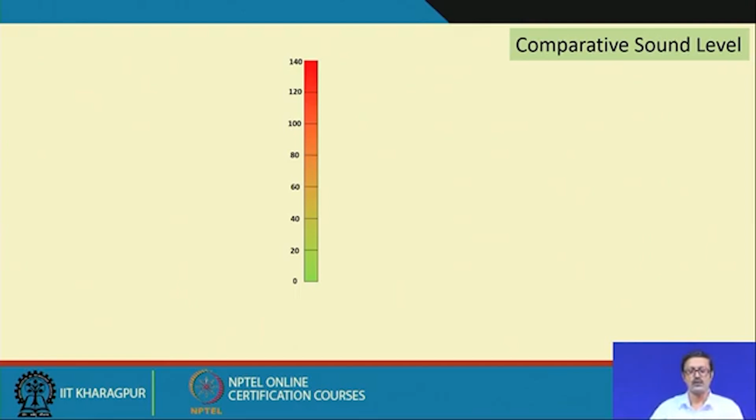So let us first compare the noise levels. This vertical scale indicates 0 to 140 dB, and on the left hand side I have put the different subjective feelings for such noise. 0 dB is the threshold of hearing and almost 120 dB is the threshold of pain.

Intermediately, communication starts to become very difficult when the noise level is just a little above 60 dB. Communication between people will gradually become difficult. That is one benchmark - the minimum level requires some amount of low background noise.

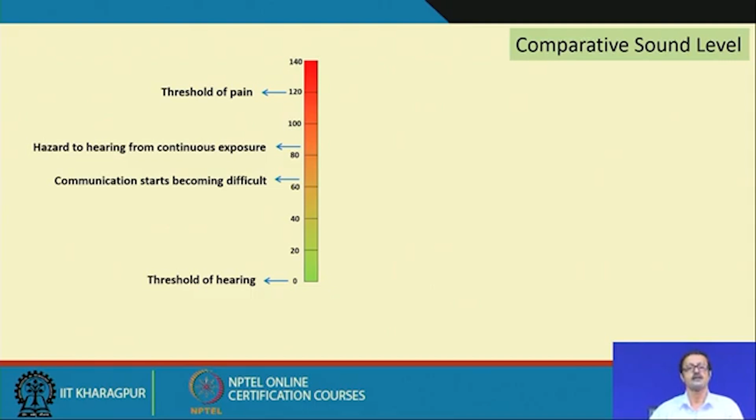And if it is a little more than 80, around 85 or so, it can be treated as hazardous, and that is dangerous from the health point of view if a person is continuously exposed to that amount of sound for a longer duration.

Now let us see the situation in different environments, inside and outside buildings. Around 37-38 dB is a very quiet bedroom, and a busy office is almost 60 dB or so. A car at a speed of 60 kilometers per hour, around 6 to 7 meters away, is almost 75 dB.

But if it is a truck at almost 40 kilometers per hour, a normal speed for a truck, again 7 meters away it gives almost 85 dB, and this depends on the condition of the truck and the road conditions. But if there is a jet aircraft, even 250 meters away it crosses 100 dB.

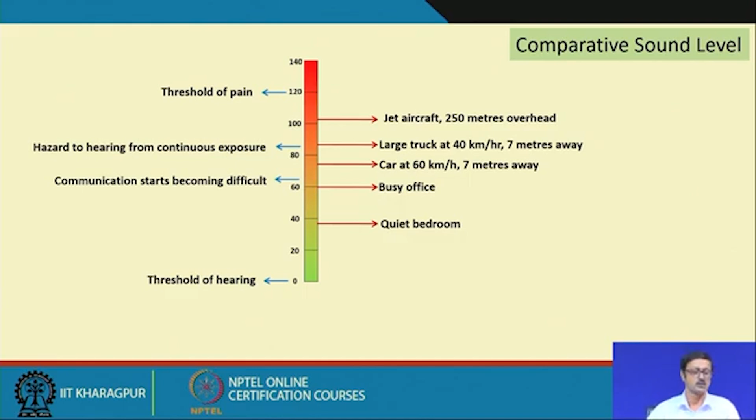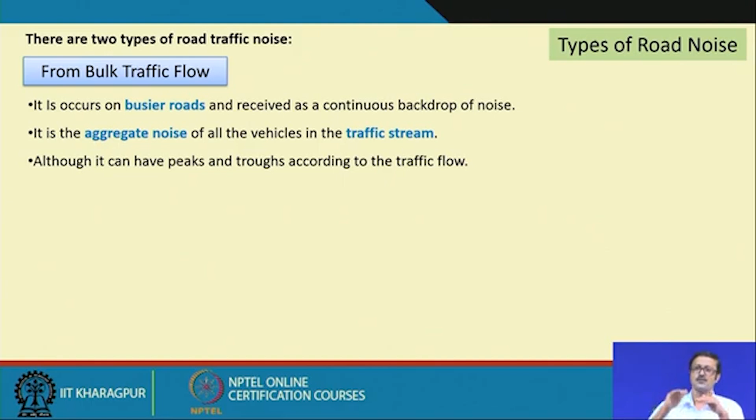There are two types of road noise. One is from bulk traffic flow, because of the mainstream traffic flow and its aggregate noise on a busier road, which has a kind of continuous noise level, sometimes with peaks and troughs, but normally it is an aggregate noise source.

The second type is from an individual noisy vehicle. Suppose it is a quiet road, but a noisy vehicle moves through with a siren, or maybe a honk, or it's a sports motorbike at very high speed, or some kind of commercial vehicle - that is from a noisy individual source.

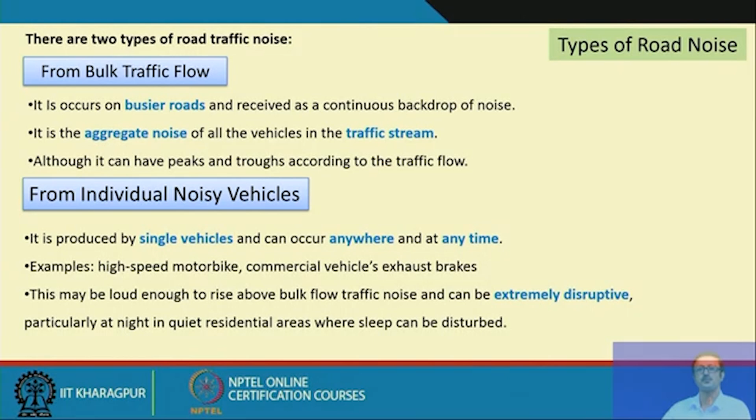So it is loud enough, and it is an intermittent kind of scenario where it shoots up and then goes down, and sometimes it is extremely disturbing, especially if it is frequent. In a quiet residential zone, this is going to hamper sleep, and it is problematic for old age people or infants.

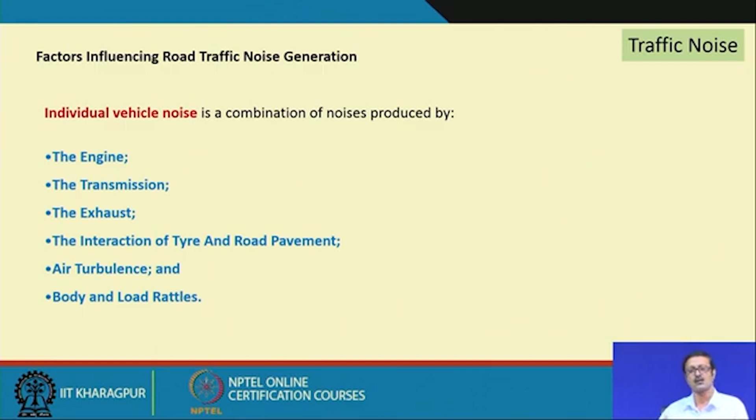In traffic noise, individual automobiles produce noise for several reasons: the engine produces noise, the transmission also produces noise, the exhaust also produces noise, the interaction between the tire and road pavement produces noise, and air turbulence and body and load rattles also produce noise.

Then there are 5 factors that have been strategically pointed out by the Central Pollution Control Board, after a lot of thorough examination and research, on which the level of traffic noise depends. The first one is the volume of the traffic; the second one is the speed of the traffic, the average speed of the traffic.

Sometimes, if the volume of the traffic is high, it is quite normal that the noise is also going to be high. The speed is again not directly proportional, but if it is high, the noise is also going to be high. But sometimes even at a dead speed, in a congestion kind of thing, you get noise because of the exhaust and the motor always running. So that also gives you noise.

So even if there is traffic congestion, that does not mean there is no noise pollution; it also produces some kind of noise. Then the traffic composition is also one of the issues. The traffic composition is a mixed traffic scenario: slow moving vehicles, some rickshaws, thelas and all, and with that there are cars, lorries, buses and bikes, which are of a bit higher speed.

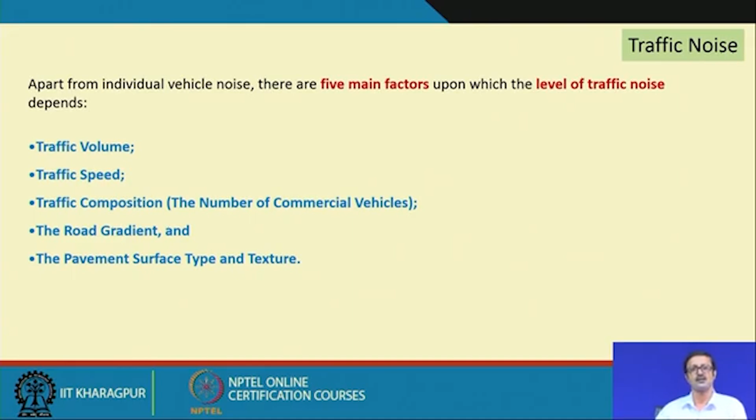In general, the road gradient is also one of the issues, the gradient of the road, whether it is steep or a flat road. The pavement type, texture and surface quality are definitely factors that also impact the amount of noise.

So first I discussed which components of an automobile produce the noise, and then the 5 factors of the road or the composition of the traffic. Then 6 major factors are also identified in our code or the pollution control literature, which from the propagation point of view contribute more.

The first one is the road profile, the grade, the elevated or the depressed road. The distance from the source to the reception point is also important. If you are farther away from the noisy road, definitely you are less exposed to the noise. The nature of the ground between the source and the reception point: if the ground is very hard, it is reflective. If it is soft, with greenery, it is absorptive, and it will not propagate that much sound.

The angle of view of the traffic stream from the reception point. Is it a direct angle of view? View and sound are very strongly correlated. The line of sight and the line of sound match each other. So if you cannot see the noise source because of a barrier in front, natural or man-made, it will reduce the sound also. The presence of screening, barriers or buildings, we will discuss in detail in the next lecture.

And the meteorological effects, like the wind, its strength and direction, and sometimes rain also can create changes in the propagation of the sound. So those are the 6 factors which affect noise propagation.

Now, the traffic noise mitigation measures. Our objective in this lecture, and the subsequent lectures, is how to mitigate that traffic noise, how to minimize it. You cannot just avoid traffic noise nowadays, it is impossible. Of course, you can reduce its impact with some strategies, and these mitigation measures are broadly classified into 3 categories.

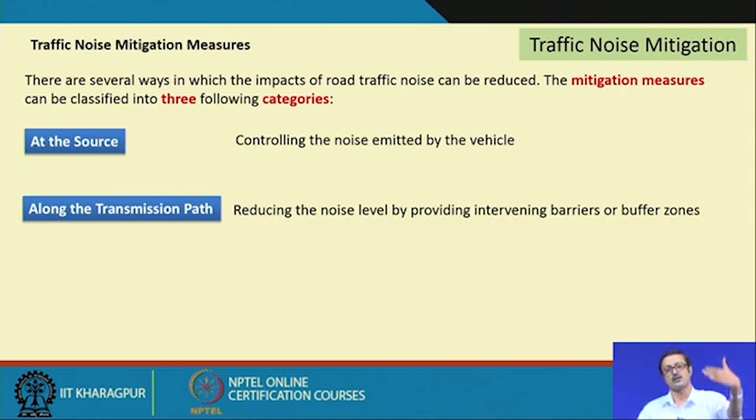One, at source: you can control the noise from the emission point of the noise source, that is, from the vehicle itself. And if you do that, you can minimize a huge amount of sound.

Sometimes we can go to the second category, which is along the path of transmission. The source of the noise may be a road, then there is a transmission path, and finally there is a receiving end, which is my building, maybe a hospital, maybe a residential zone. In this travel path we can also make some changes, some barriers, some landscaping, or some human barriers, which can help us reduce the noise.

And the third and final one is at the reception point, that means at the building level itself. You may not do anything at the source or on the path, or the path is too small because your building is very near the source, with no space for tree screening. So at the reception point you have to design your building architecturally, from the orientation point of view, site landscaping or site planning, in such a way that you reduce the sound.

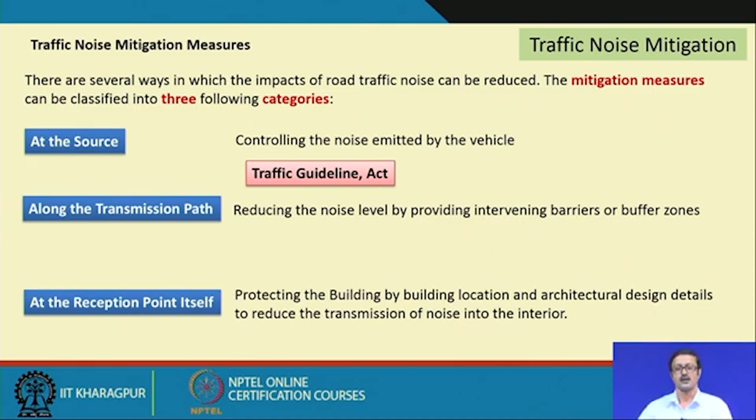If I want to do the first one at the source level, I need to put some kind of a very strong act, maybe some traffic guidelines, so you can reduce the source sound. If I want to do the second one, along the transmission path between the receiver and the source, then I need some kind of town planning act: this much area you have to leave, here you cannot construct anything, this much of wall, and so on. You can impose urban design guidelines to reduce the transmission of noise, or sometimes divert the noise in other directions so it will not disturb your noise sensitive zone.

And the third one is the reception point. Here you have to bank on the architectural design, because in the third case the reception point is a building you have to think about. So it is the duty of an architect to design a building and shield it from the outdoor noise. So, in a nutshell, this is the traffic noise mitigation technique.

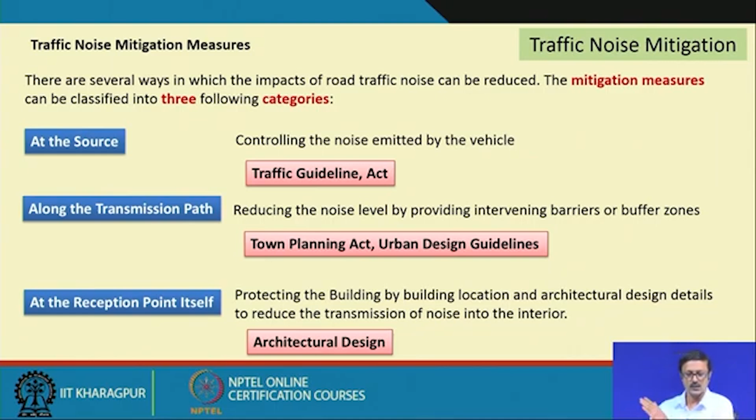In this particular lecture, we will discuss only the first one, at source. In the next lecture, lecture number 39, we will do the second one, urban noise mitigation through the transmission path, and in the last lecture, lecture number 40, we will deal with the architectural considerations.

So, noise control at source, as I have already told you, is the most effective way to reduce noise, because if the source is weak from the noise producing point of view, then definitely all your problems are solved. But it is very tough to do; it needs city rules implementation and a traffic management system. This control and reduction has to be implemented both for the bulk flow noise and for the vehicle noise. The following subdivisions can be made from this point of view.

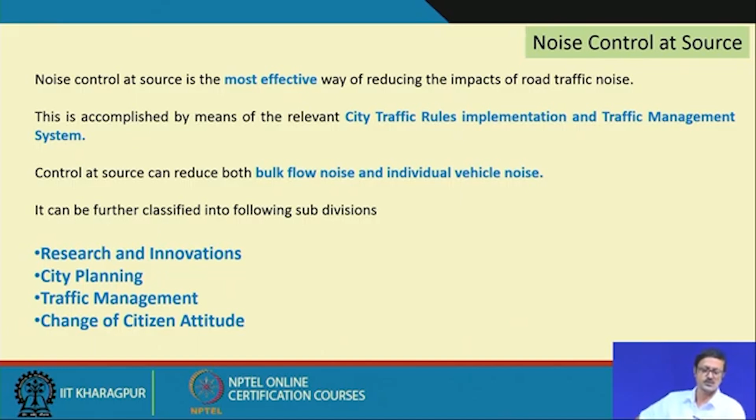Noise control at source covers research and innovation, city planning, traffic management, and also the citizens. From the research and innovation point of view, it is the development of new low noise emitting automobile machines, new tire technology, even new road surface materials.

Those are the areas in which research and innovations can be thought of or maybe implemented in our automobile industry, or maybe in the construction, road construction sector. That can reduce the noise.

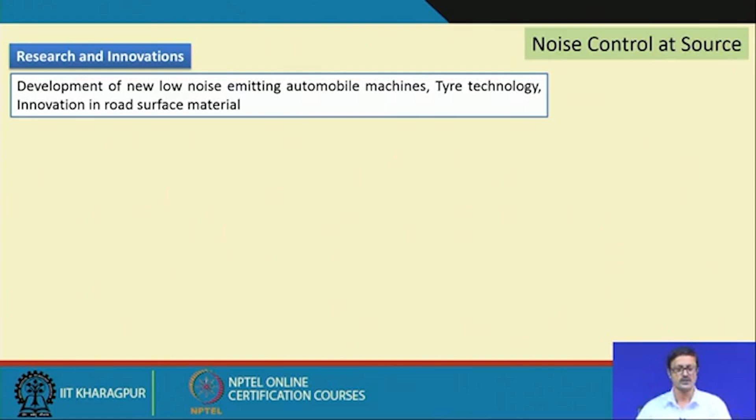The second one is city planning, town planning. The city planners may do some kind of zoning, or some kind of distribution of the noise sensitive zone, and proper land use planning of which areas of a city are very noisy. So you have to segregate in the master plan that this part will be used for the commercial zone and this part will be the residential or noise sensitive zone. So that kind of thing they can implement or propose.

They can also make some development control rules, in the sense that in this area this particular building type is not permitted, or in this particular area, if you have to construct some building, you have to give a minimum amount of setback. All those kinds of development control acts. Sometimes the high rise buildings may also be exposed to the noise, because there may be a boundary wall or some kind of barrier, so the upper floors are very much exposed to the noise.

So you can also develop some kind of development control act for high rises, on what will be the height of the buildings. Definitely city planners do that, but maybe not from the noise point of view. They control the height of the building because of the vicinity of the airport sometimes, or sometimes because of the gradation from one point to a deeper point from the road point of view. And sometimes, if it is a commercial zone, to utilize the maximum FAR. For those cases they limit the height, but maybe not from the noise point of view.

They definitely do some kind of micro zoning within a zone. Suppose in a satellite city, a part of the city is looked at in various micro sectors, and those micro sectors can be segregated or differentiated from the noise sensitivity point of view.

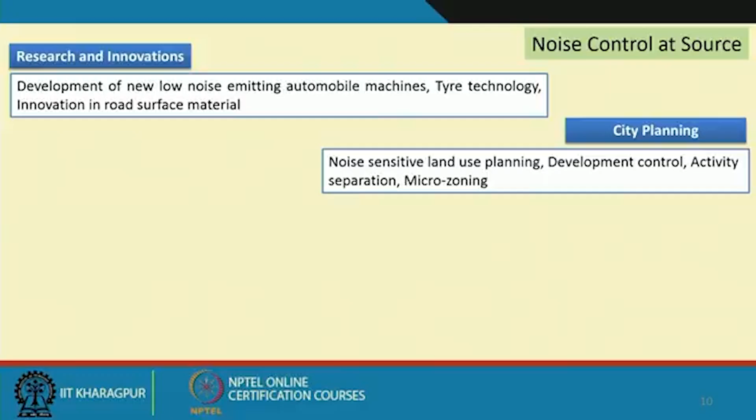The third one is traffic management. This is another important area that can minimize the noise from the source. Some traffic rules, some rules for overspeeding or for driving a noisy vehicle, so there may be some kind of penalty. No horn zones can be created in some areas. For the city traffic movement, no entry zones or rerouting zones can be thought of for a particular area.

And definitely this point is very much important, that is regular maintenance of the road. Sometimes you develop a road and you forget to maintain it properly. That is sometimes very problematic, since it directly gives a penalty to the vehicles going on that particular bad road, penalty in the sense of wear and tear, and it also creates noise scenarios.

And the last one is the change of citizens' attitude, and this is another one we just cannot ignore. Citizen sensitization, some kind of participatory activity is required, particularly from the very beginning, from kindergarten age to the matric standard or board standard students, because if you sensitize the children, then the next generation is prepared to take care of all those issues. Of course, the government is doing so, a lot of NGOs are also doing it, and the administration and police are also doing it, but citizens also have to change their attitude.

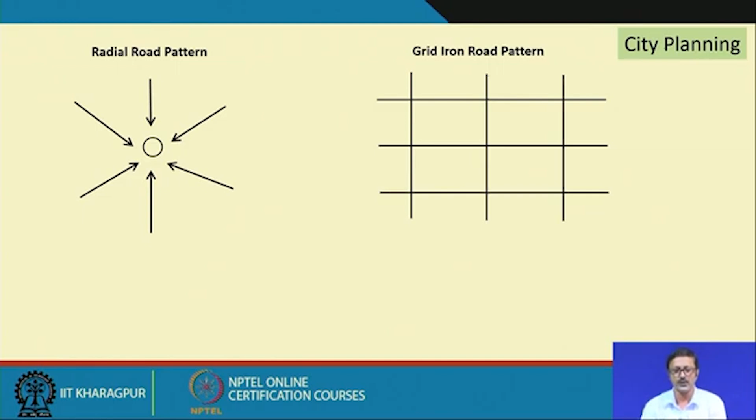So from the city planning point of view, there are a few fundamental things which I have noted for this lecture. There are road patterns: there is the gridiron road pattern, where the city falls in a gridiron way, and sometimes there is a radial pattern. If you see the plan of New Delhi, it is a radial pattern road; if you see Chandigarh, it is a gridiron kind of thing. So if I compare these two road network situations from the noise point of view, I must say this gridiron is good.

Gridiron is good in the sense that it provides less concentration of the noise, whereas in the case of the radial pattern, all vehicles are actually concentrated in a rotary or in a particular concentrated area. So the noise concentration is practically more in this particular area. So there you won't get the silent zone or the noise sensitive zone.

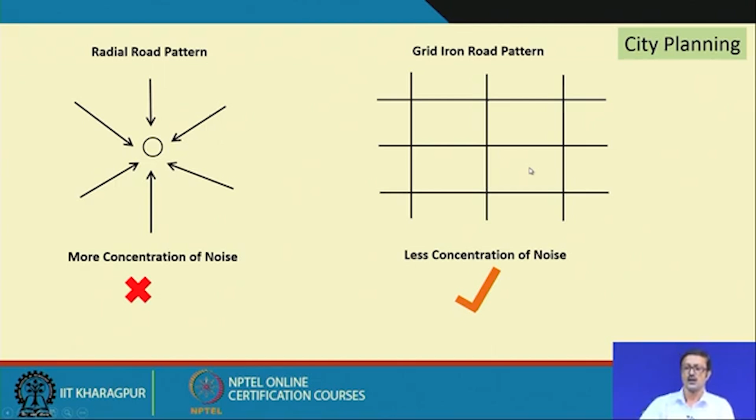Here, because of that, maybe in the central pocket in each sector you may get space for the schools, or maybe this particular one can be a school, one central space maybe for some kind of a park, and another one maybe for hospitals or a residential zone or so.

Now, next, suppose you take a gridiron pattern, and in that gridiron pattern you have two types of traffic scenario. One is a two-way traffic. These black arrows are indicating the road, and these arrows are indicating the direction. So here suppose there is two-way traffic, so in this road both-way traffic can flow, and here suppose there is one-way. So from this road only the upper direction, and from this the lower direction, and the right and left side direction flows are possible.

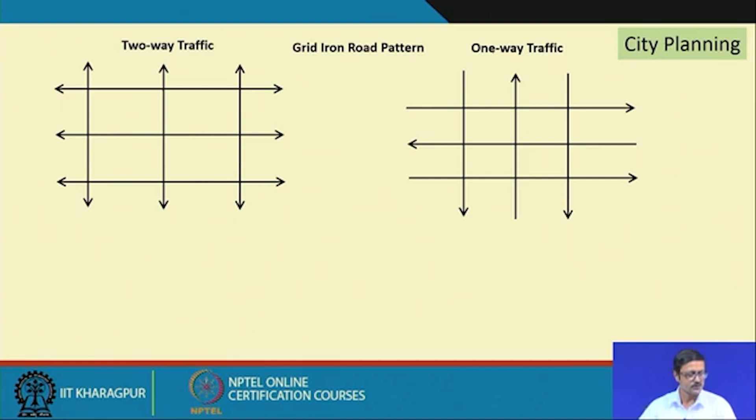So out of these two choices, if I want to see what will be the effect of the noise, then we must prefer the two-way traffic system, because theoretically if you concentrate a two-way over here, you will get a larger pocket area; that is number one. Number two, as we know from the very beginning, if two equal sources are added together, the decibel level increases by only 3 dB.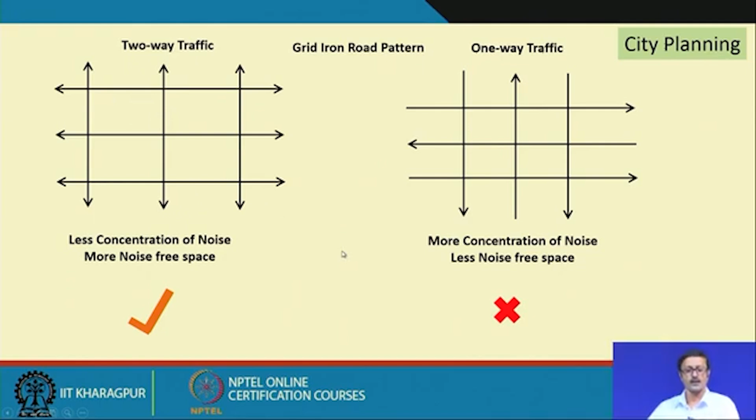So suppose this is source A, this is source B, and this is another source C. If these two sources are added together and put as one source, then only this particular road will be increased by 3 dB, if I assume that both roads' output is the same. So it is just a 3 dB increment in one. You can avoid a central road of the other direction also. So you will get much wider road-to-road distance, and a much larger noise sensitive area can be found out from there.

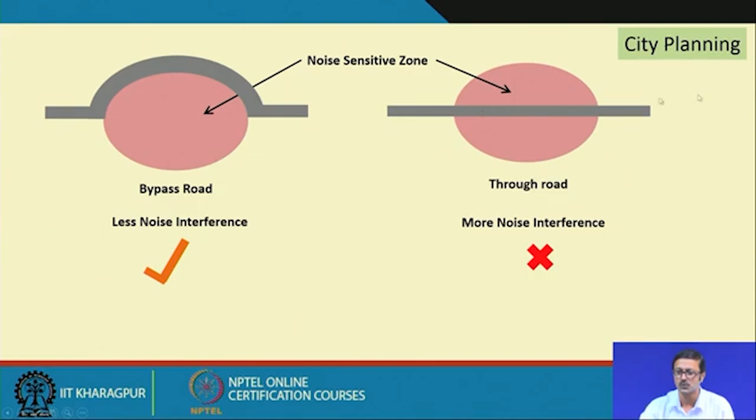So this is very obvious: a bypass road is always good, because that will not go through the zone which is demarcated as a noise sensitive zone.

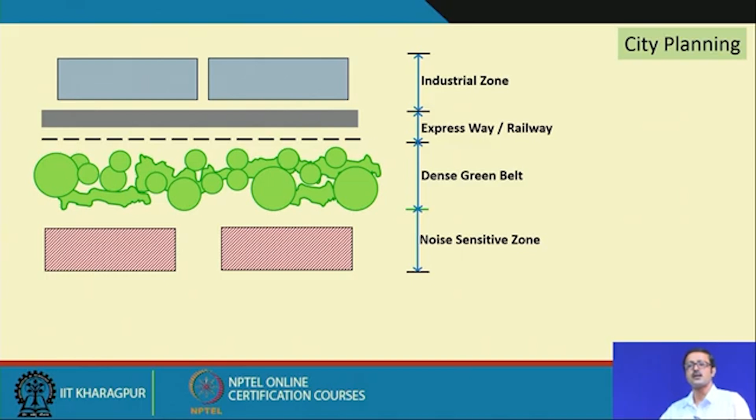Then from a city guidelines point of view, we also follow this rule sometimes. You segregate the industrial zone toward the outer side of your city and then put all the expressways and the transportation corridor, and that can be shielded through a green zone or dense green belt, which will help in shielding the noise and also purify the dusty air from the industry, and your noise sensitive city areas can be on the other side of this green zone. That is one of the ways city planners plan new cities. So traffic management systems are also one of the important issues.

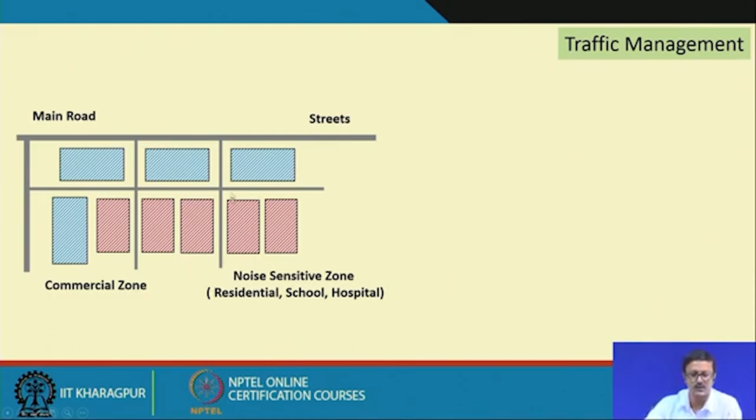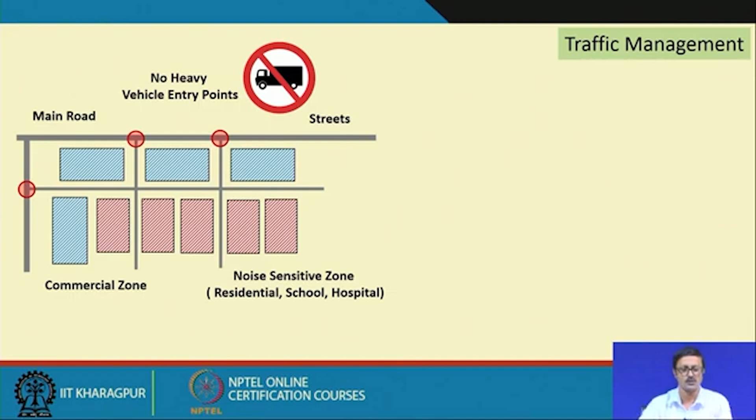So suppose these are the streets, and these red blocks are your noise sensitive buildings. This is your wider main road, and those blue buildings are commercial buildings in the periphery, near the main road. This will be the tentative micro zoning at this level, and there are some lanes. What we can do is put a no entry point here for heavy vehicles on those streets, at least at night or during some day hours, depending on the activities around here, and that will help in reducing the noise at the source level itself.

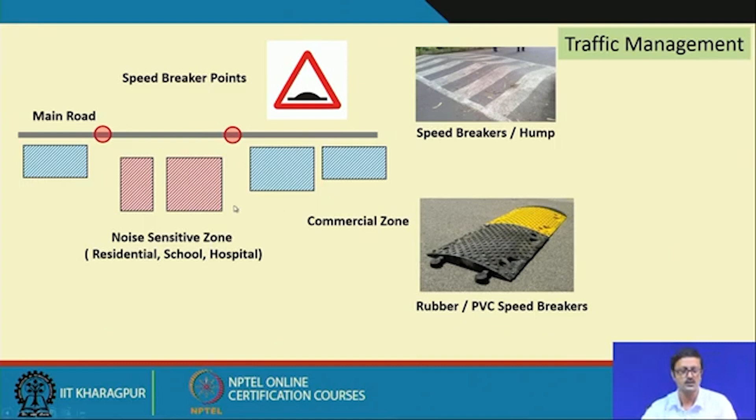Then suppose you have a main road with a noise sensitive zone in between, and there are commercial zones whose buildings are not that sensitive. So you can provide humps or speed breakers here to reduce the speed, and you can put a no horn signage also, so there should not be any disturbance along this patch of the road near the noise sensitive zone.

So, again CPCB gives us some kind of a criteria of noise, which in daytime the industrial area should not be exposed more than 75, night time 70, commercial area 65, 55, residential area is important, is 55 for the daytime, and the night time it is considered as 45 dB, not more than that.

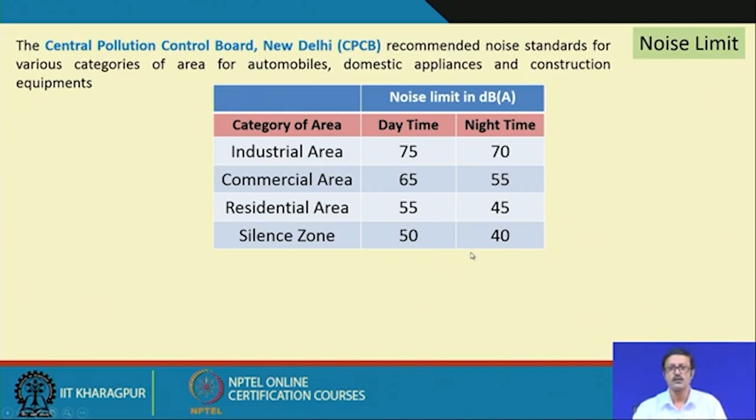In fact, the silence zone is actually 50 and 40 in day and night time as per our Indian standard, and this daytime and night time are also mentioned from 6 to 10 and 10 to 6 in the night, and silence zone as per the code includes hospitals, educational institutes like school, college and all, and also court.

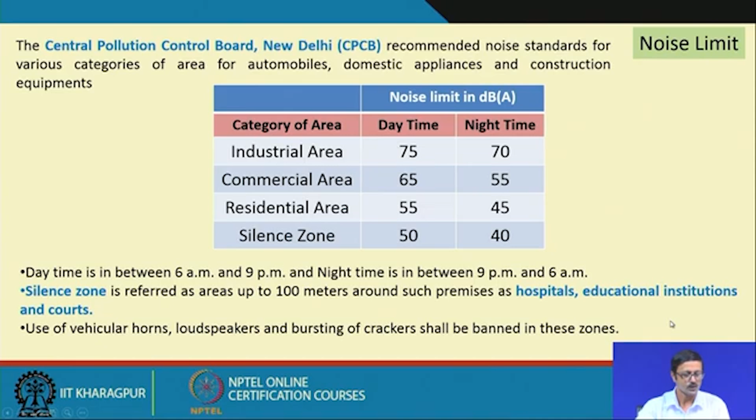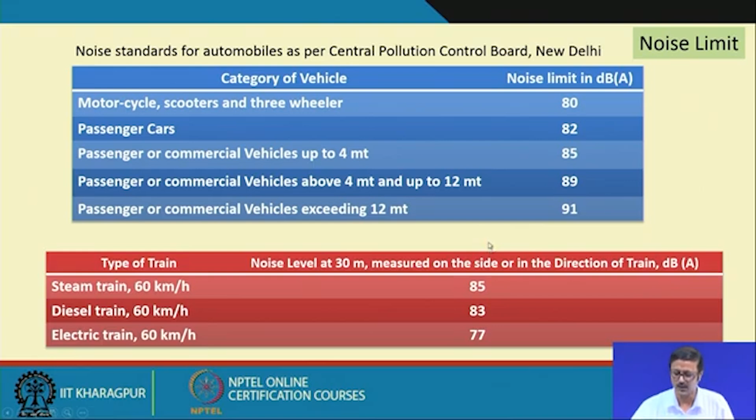The aircraft noise is also very important, and this aircraft noise is also considered as one of the annoying noises for those who live near the airport. They actually can tell you better, if they are very near to this landing or the flight takeoff zone. So, it's really annoying.

And two types of noise have been classified as far as the aircraft noise is concerned. One is called the flyover noise, which actually occurs due to the flight path, because of the takeoff and the landing, and another one is called the ground noise. This flyover noise is having a high peak and a drop, and a high peak and a drop if you take a large time segment, because of the landing or the takeoff activities.

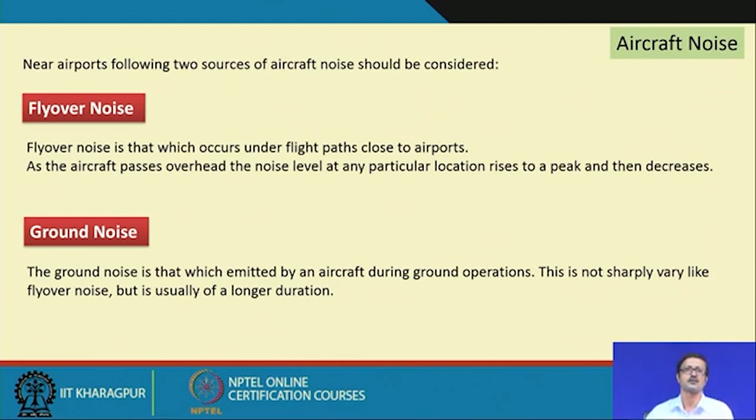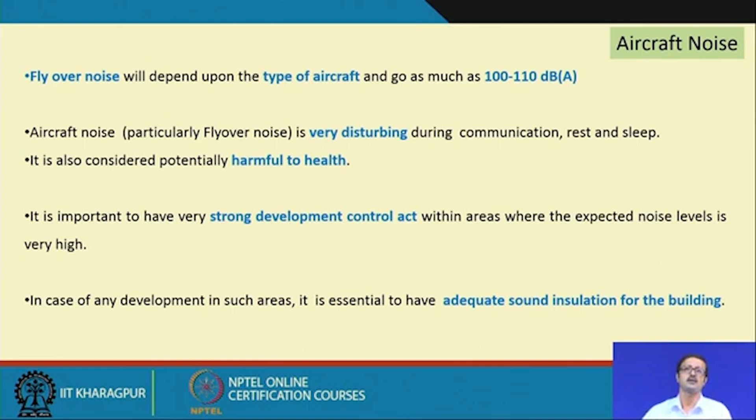But the ground noise is the sound emitting from the aircraft during ground operation, the movement and all other activities, and that is a little bit low, not that sharp, a kind of static scenario. So, it is harmful to the health of course, and this sometimes goes as much as 100 to 110 dBA, and it is important that a strong development control act has to be implemented in nearby areas of the airport or air traffic zone, and if some development still needs to happen there, you have to adequately insulate your building from that sound.

And in this aircraft zone, in the vicinity of any airport, we need to measure what is the noise and what is the amount of this particular noise effect. So, a single number evaluation system was developed by the US Federal Aviation Agency, and that has been followed almost everywhere, and that is called noise exposure forecast, NEF, which is a single number, and the procedure of achieving that particular single number is a little elaborate and complicated. So, we are not going into detail on that.

So, this single number is something like a contour kind of a thing. It is primarily used to develop a noise contour. That means, this area is a high noisy zone, then the next ring is a little less, and then the next ring is a little less than that. So, those numbers have been created due to the number of aircraft and the number of the peaks and troughs

due to the landing and the takeoff scenario, and this NEF, the noise exposure forecast, is given with some number like NEF 40. If it is NEF 40 or more than that, it is unacceptable. I mean, any kind of development over there is unacceptable. So, it is a very noisy zone.

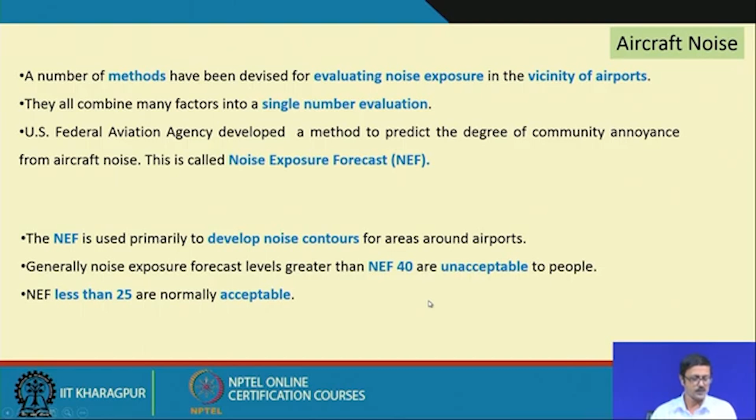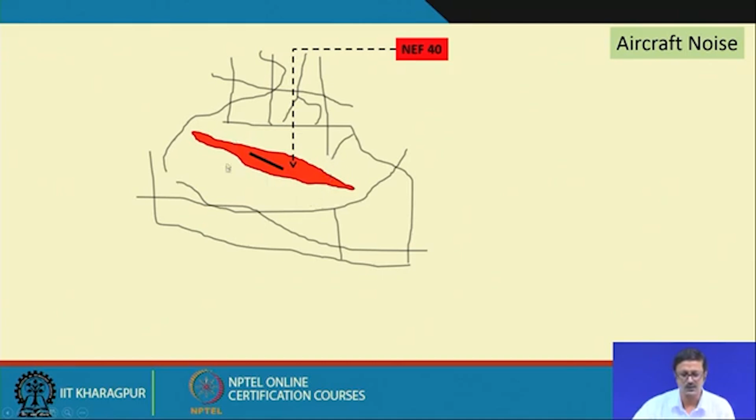Consider a situation like this city map. I'll draw a sketchy city map, with a landing strip here, and this is your airport area. If you do this NEF, you will find this red zone which is NEF 40, so there should be some kind of development control. It should not be developed, and mostly it will come under the airport zone itself, though some parts may extend a little further where there may be residential area, but still there should be some development control act.

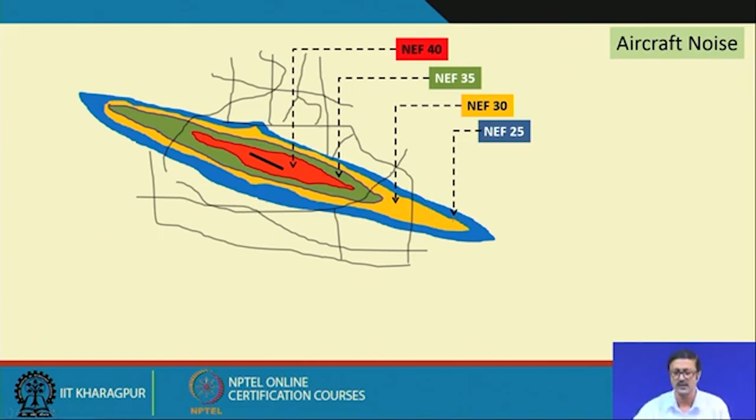The next ring is another stretched contour, colored green. I've marked here: if NEF 40 is the red one, this is NEF 35, and the third one, a bit softer and larger, is NEF 30. The blue one is NEF 25. So it can be thought that residential area growth may start from this blue boundary onward—this part can have the growth of the city.

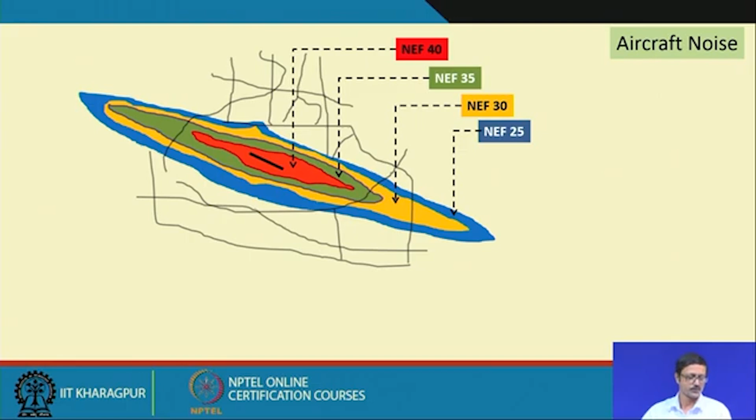This is the real sound exposure—a huge amount of sound that gradually diminishes. So this is the NEF, which gets demarcated, and then town planners will actually apply some kind of development control act on it.

Anything with NEF more than 40 is high impact, equivalent to almost 80, more than 80 dBA. In between 35 to 25 NEF—that is this yellow to green zone—is medium impact, 65 to 75 dBA, and NEF less than 20, beyond this zone, is less than 55 dBA. There's a small mistake, this should be capital A.

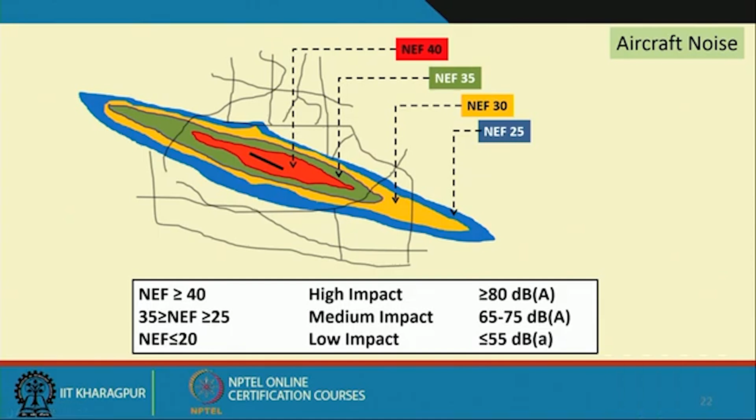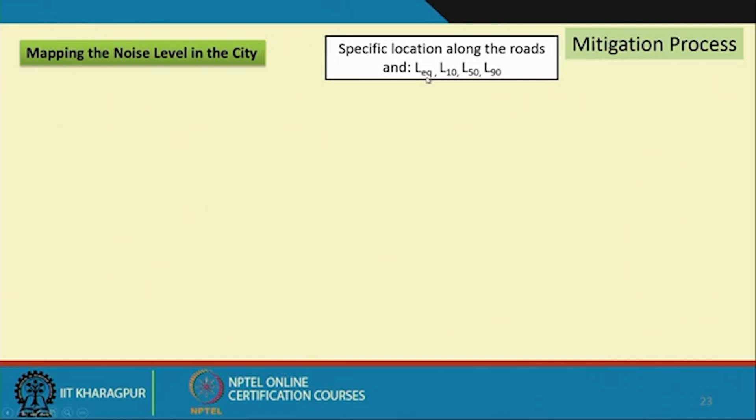From the mapping point of view, noise mapping is specifically concerned with this. As I've already told you, you have to find the L equivalent, L10, L50, L90, and then identify the noise hotspots, which may be road crossings, narrow roads, roundabouts, mixed traffic zones, busy roads, etc.

In the third stage of the mitigation process, you have to overlay other sensitive zones like parks, residential zones, schools, hospitals on this map. Overlay your noise map with your sensitive zone map, and then find and demarcate the conflict zone.

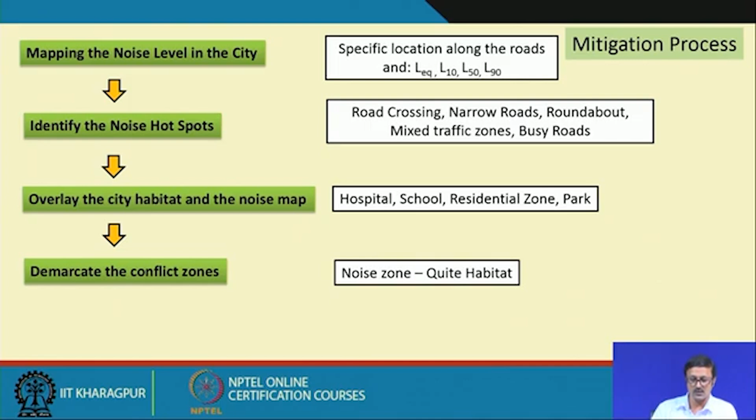If your hospital is under the silent zone, not a noisy zone, fine, no problem. But if it's in a noisy zone, then there is a conflict—demarcate that conflict zone. Now you have to take strategies, whether to go for entry control, reroute traffic, or enforce no parking.

If there's a very narrow road, and due to the narrow road people are parking there, the road becomes even narrower, causing honking and noise. So you may go for a no-parking zone there and increase the width of the road to give passage, and sometimes restrict entry for trucks and heavy vehicles. So you can take some kind of decisions—those are the typical steps we follow for the mitigation process.

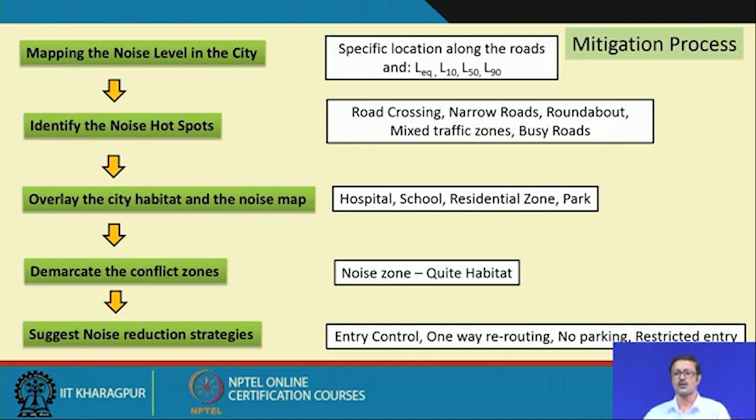I think that is all for this lecture. I'll give you a small exercise: from a different city in your country, locate the noise sources of your city—think about what the sources of noise are in your city or town. Take a map of your town or city and locate the hotspot points of your noise.

For the second part, you can link this with your first assignment—how to reduce the impact of urban noise, what methods and examples you can think of for your city, or not necessarily a whole city, but for a stretch of road or a noise hotspot point like a roundabout or so.